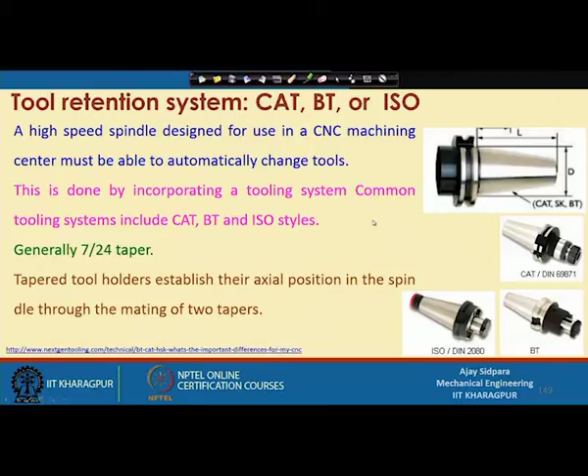So, this is the slide which we have seen, that there are three standards: CAT, BT and ISO standard, and these standards were developed before micro machining came into existence, when there was not much discussion about it. So let us see what are the problems associated with these standards, so that we cannot use them for micro machining applications.

These are the disadvantages. Now we know this is our spindle part and this is our tool holder. When the spindle speed increases, the spindle shaft tends to expand due to centrifugal force and thermal effect, and that is called bell mouthing.

Let us discuss this thing first. Initially our system was completely fine. This was the spindle part and this is the tool holder. So this is the initial condition, but what happens when you start rotating at extremely high RPM beyond the allowable limit?

Then the shaft, the spindle, will try to expand. Because of that, you are getting an opening here. So this is called bell mouthing, that is the problem.

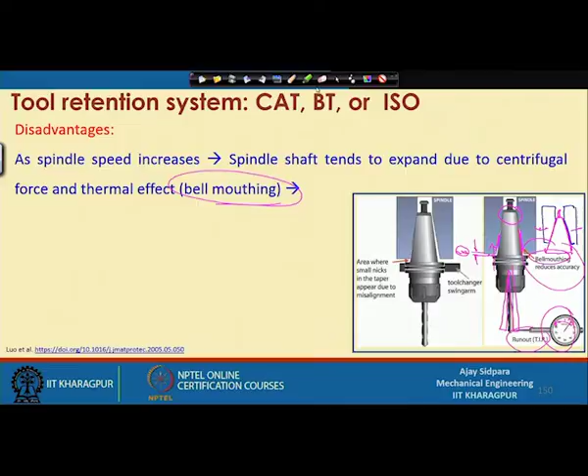Now, the taper of the tool holder is drawn further into the spindle, because the drawbar is continuously holding this thing, pulling in this direction. So if you are getting this part, because of this pull, your whole tool will go further inside. So this is the actual position.

After that, it will shift a little bit inside. Now this is your position — it is touching and clearing this gap, so this face is touching now. Whatever this gap is, that much amount in Z is going inside, and you are not accounting for this in the machining.

Suppose this is your workpiece and this is the feature you want to cut, and consider this dimension is 500 micron depth, and you are cutting a slot out of it. When this happens, what you actually want is for the cutting tool to reach this location, but because your holder is going further into the spindle, your tool is actually reaching at a different location.

So this is your tool z axis, correct. So whatever is this phi here, whatever this going inside, that means how much is the inaccuracy in the z motion. So that much actually inaccuracy you will get in the machining feature, whatever feature you want to create.

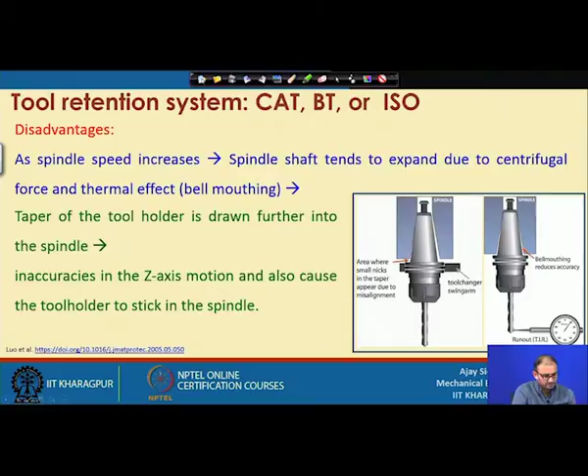Here in this particular case, mostly you will get an oval shape hole. So that is creating more problem in this case. So both ways, ultimately, you are not getting the part as per your dimension. So this is the problem with the CAT BT or ISO type of standard.

So now there is a system called HSK. It is comparatively new compared to the ISO standard we discussed just before. A new DIN or ISO tooling standard has been developed with a particular application for high speed, known as HSK.

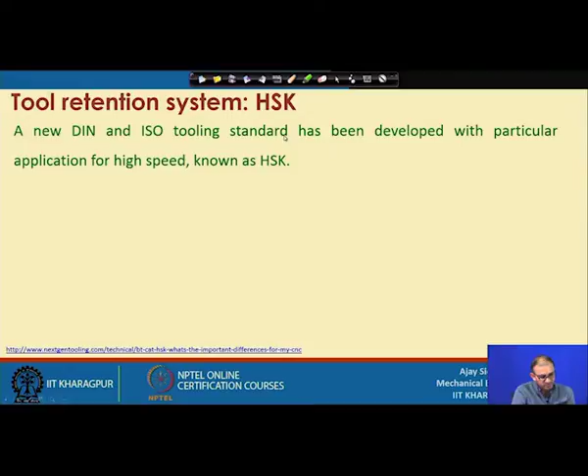It is called hollow shaft, hollow shank shaft, something like that. It's a German name, but it's considered that the shaft is hollow, a hollow shank shaft. So this is the system, and now you can compare both things, how they differ from the earlier case.

Differences are many. First, this much dimension is not present, so it is almost half the length of the conventional CAT, BT or SK standard. Also, the taper is much less. And there is something very important or different compared to the earlier part: it has different types of contact surfaces, not only one contact surface. Let us see what things are there.

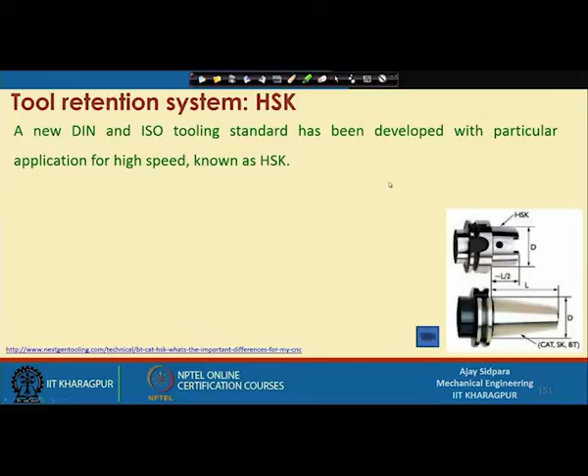It is particularly used for high speed spindles in high precision machining centers, and HSK tool holders are retained in the spindle by a set of internal grippers located inside the spindle. So what is this thing? Let me show you that video.

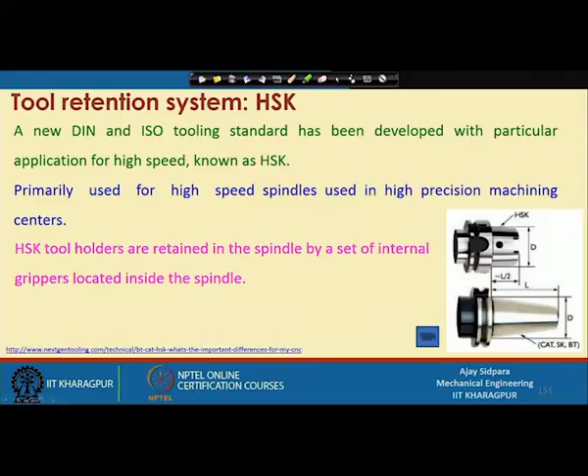So this is an HSK type of spindle. You can see here, this yellow color is the HSK tool holder. Now this is the set of internal gripper. Let me show you that.

Let me finish this part. Now this is the removing of this part. This is the internal gripper. If you see this particular part, when it is going inside, this drawbar component will actually expand and try to push this thing at this location.

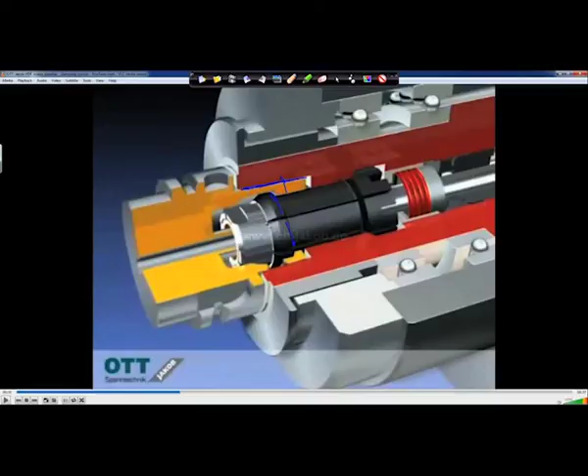So it has a contact here, this is one contact, and not only pushing, after pushing it is actually drawing inside. So you get another contact here. It has a dual contact.

This particular HSK has dual contact, and that is the advantage: even if there is some type of misalignment, your tool holder will not penetrate inside, because it has contact with the face also. So this face contact will not allow it to go inside.

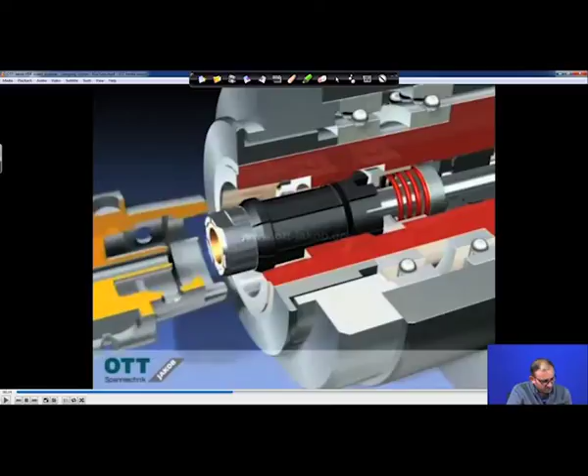So it is going down. When it is moving, it is compressing, and at that time you can remove this particular part away from the system, and then again it first goes inside and then expands. So you get a perfect connection between the two parts.

So this is the mechanism by which you are putting it in, either pneumatically operated or hydraulically operated, so that you can easily get the displacement required without any problem.

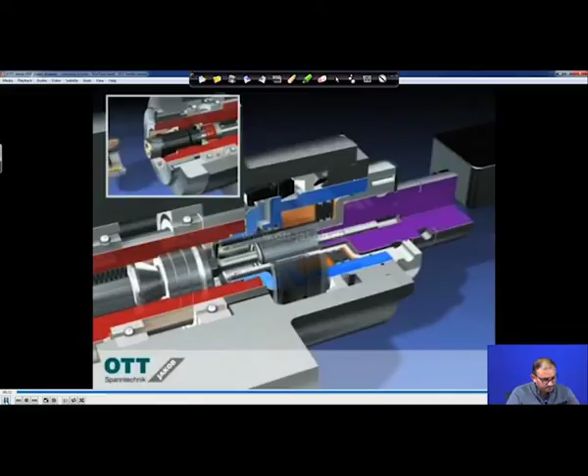Now this is what it is doing. When it is pushing down, this particular thing is getting compressed. So when it is compressed, you can remove this thing away from the system, and then it is pulling back again, pulling this tool holder also, and after pulling it will expand and touch the surface of the spindle system. This way you can get this thing done.

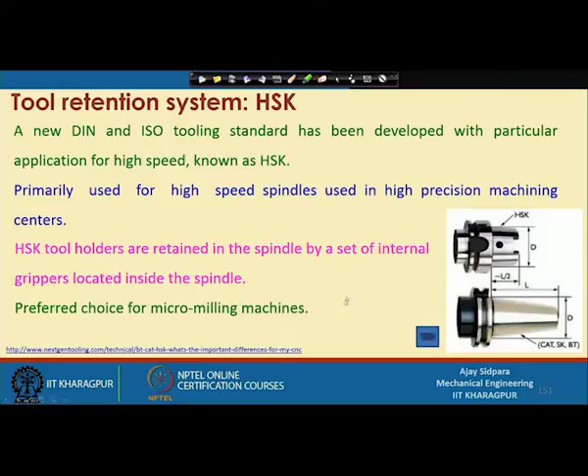Let us see how this is important, how it will create a good joint. Because of this internal gripper, you are getting good acceptance in the micro milling machines. Now compared to contact, let us see how the contact happens, that is what is important.

Now these are the things between the V flange and the HSK spindle. You can see that in the animation it has two contacts, this is one contact and this is the other contact, but in this particular case we know that this stud will be pulled by this drawbar.

When it is pulling back, you have to create a gap here, considered a 3 millimeter gap between the spindle and the V flange. Because if that gap is not there, this pulling has actually no effect. By chance, if this thing is coming into contact first, before it matches this particular taper, then you will get a wobbling motion in this direction and this direction. So this gap will ensure full contact all over the taper direction. That is the advantage of keeping this part.

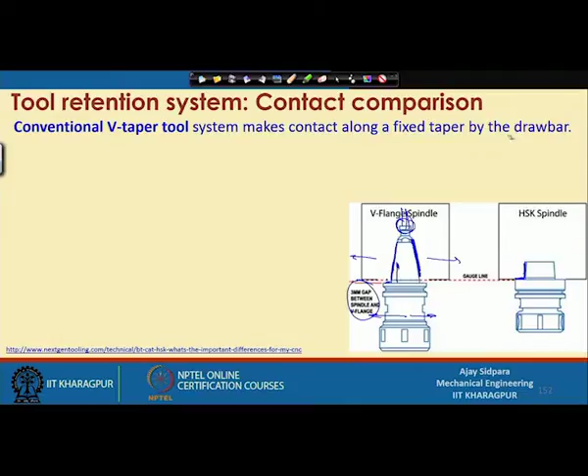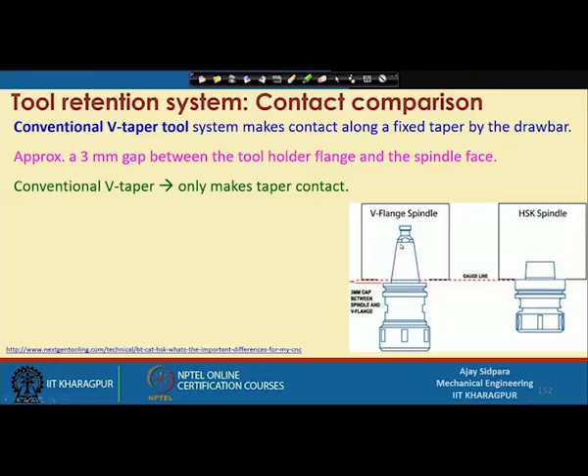But this 3 millimeter gap will create a problem, because when this thing expands, this gap tries to reduce, and then the whole system will go inside of it. So conventional V taper tool system makes contact along the fixed taper by a drawbar. Approximately a 3 millimeter gap between the tool holder flange and the spindle face is given here, so it only makes a taper contact. That is the problem here, it is a contact at the taper only, and that is creating problem.

But HSK is the short taper which fits into the spindle. So this is the only thing which is going inside the spindle, and here you can see it is a very large amount of mass which is going inside the spindle.

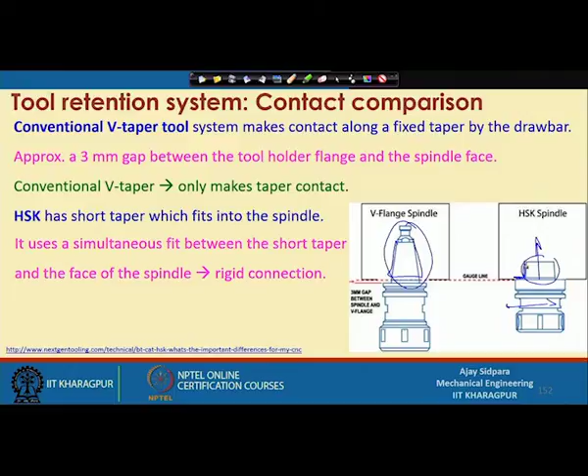It uses a simultaneous fit between the shorter taper and the face of the spindle. Because of that, you get a rigid connection. So now it will not move in any direction, it will not go in this direction also, because this particular face will prevent this motion from happening, and when it will not move in this direction also, because now this is also in perfectly aligned condition.

So in radial direction or axial direction, you will not get any type of movement. It has a dual contact between the spindle face and the taper. So here you get only a taper contact, but here you have a face contact and taper contact, both things.

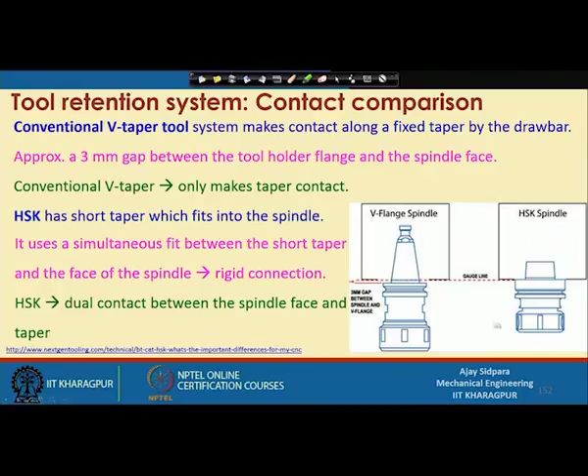Now, how you can compare the drawbar mechanism, the way your drawbar is holding this part. If you see this, our conventional holders are held into the spindle by a drawbar with fingers that wrap around the outside of the retention knob and pull stud. So your drawbar mechanism is located at this location. When your clamping is done, this whole thing is actually moving inside the system, and because of that movement, you get a contact with the spindle face here. So these are the contact surfaces, whatever these two surfaces given, that is the contact surface.

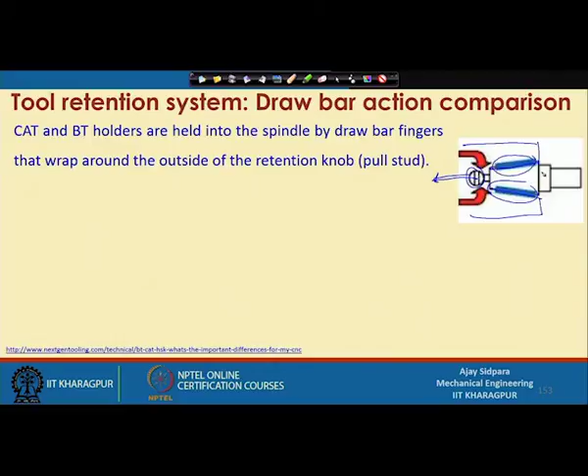And HSK is a different thing. We have seen that it is not like that, it is not pulling any side. First thing, all that gripper is actually going inside it, then it is pulling, and then it is expanding. So it has an internal gripper here. Here it is an external gripper, because whatever it is pulling through the stud, and the stud is located outside of that part. Here what is happening is that it goes inside this part, and then it is expanding, after going inside, then it expands out of it. So it is called the hollow shank, that is because of that name, hollow shank taper. So that is the HSK part.

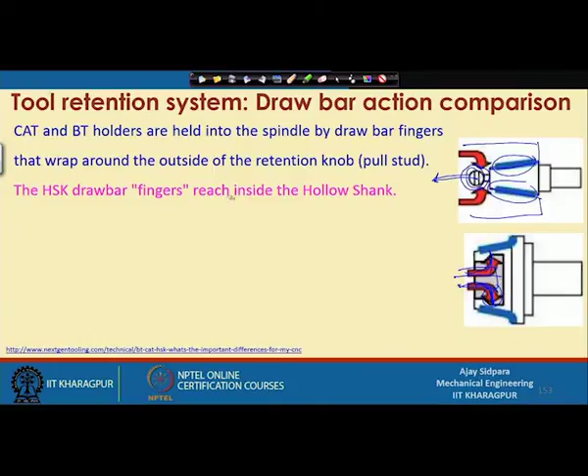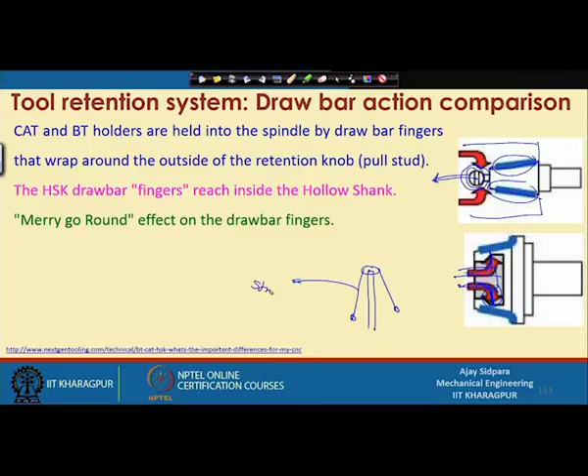So it has a finger which reaches inside the hollow shank, and because of that, you will get a merry-go-round effect in the drawbar. Consider that you have a mass here, and this is the string. So this is the mass, and now you rotate this thing. When you rotate this thing, this whole thing actually goes into the outer dimension, because this thing will go here, depending on the RPM, and then it will go away and away. So that is called the merry-go-round effect.

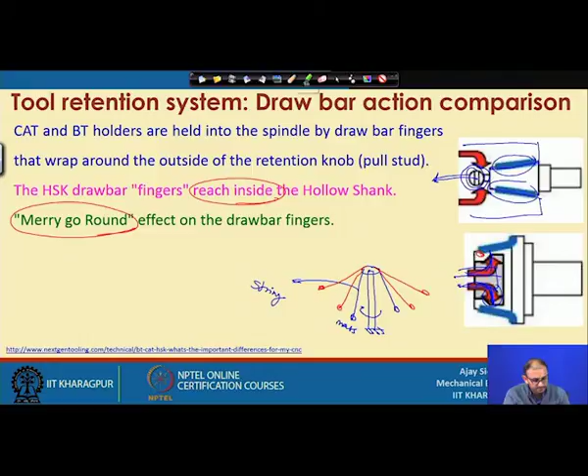But the merry-go-round effect is very good here in this particular case, because it is actually drawing from inside. This word is very important, because if it is going in merry-go-round, then what is happening is that those things whatever are here. Now you can see that your contact is here, correct, so it is an inside contact. So what is the advantage? Whatever the RPM you are rotating, your contact actually further sticks to the surface, it will not expand, but here things are exactly different.

Whatever things are here, this is your spindle part. If this thing is expanding, then what is happening is you will get a loose connection. But here, if it is expanding, you will further get a strong connection. So that is the big advantage of this thing. Even more you go with higher speed, more it will retain, or more it will firmly grip with the surface. That is the advantage, and that thing is called the merry-go-round effect in the drawbar fingers.

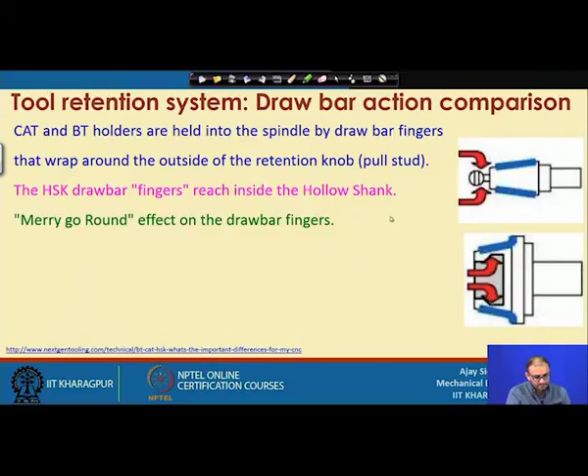So as RPM is increased on the HSK tool holder, the drawbar fingers become a tighter connection on the inside of the flange and increase the pressure onto the spindle connection. So this is the advantage of using this particular part, because whenever you get a higher RPM, your drawbar will push this particular part, and whether it is a centrifugal force action or thermal expansion, everything will make this thing more strong. Here, those types of thermal expansion or centrifugal force will actually adversely affect the conventional tool holder. So that is the difference between these two different systems.

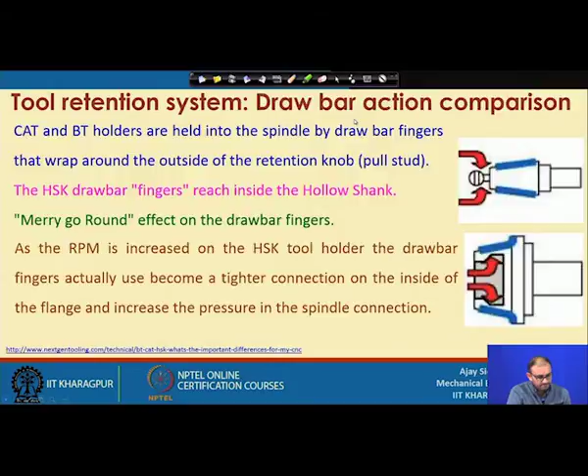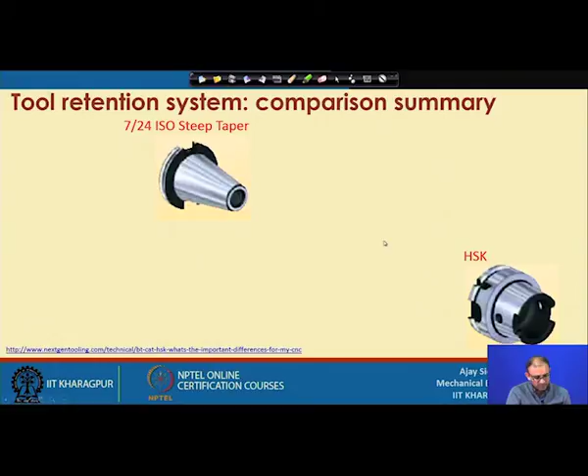So now, what are the comparison summary between these two systems? This is the taper ISO BT standard, whatever we are thinking, and this is the HSK tool holder. So first thing is the one surface contact here, and here you get the dual surface contact. That is the big advantage.

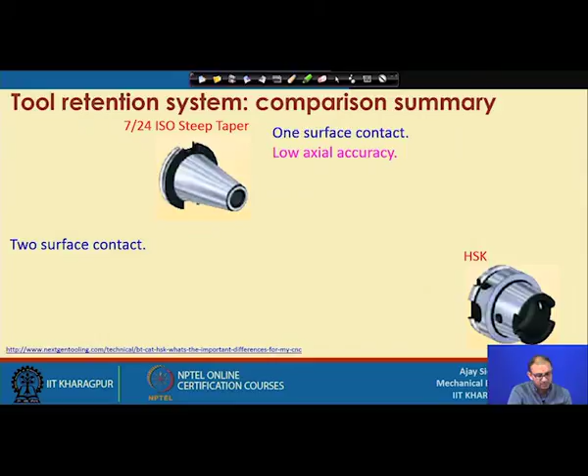Low axial accuracy, because now we know we are getting a shifting in the Z direction. Whatever problem is there because of this misalignment, everything will be reflected mostly onto the Z direction, and if you compensate with the Z direction, then again it will create a problem in both X and Y. But here you get the higher axial and radial accuracy, because you have a dual contact on two surfaces.

Relatively low stiffness here, because whenever you are putting a load in the axial direction or radial direction, the problem is you are getting a deflection, because the contact here is friction contact only, and that is also on one surface. Because of that, you will not get high stiffness on the part. So here you get higher stiffness, because it has both static and dynamic stiffness high compared to this particular system.

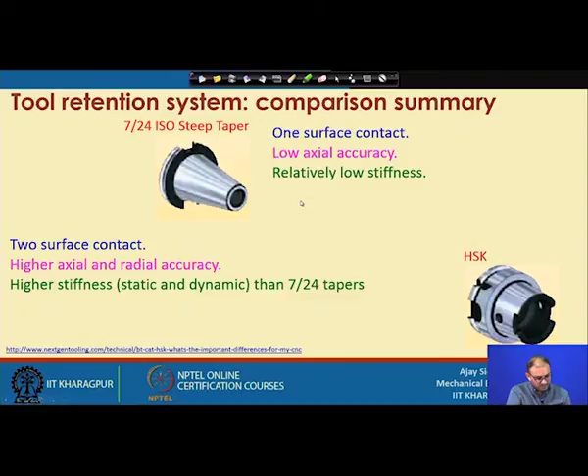Not suitable for high speed, because it has outside clamping, as we just discussed, whenever there is outside clamping, at high speed the centrifugal force and thermal expansion both adversely affect there. But this thing is suitable for high speed because it has inside clamping. This inside clamping will make your system more and more strong when it is rotating at a high RPM.

Another thing is the large mass and the stroke. That is also creating a problem, because you have to remove this particular thing very quickly, and you also need higher speed, because when your mass is high, rotating at high RPM is also creating problems. Every time you have to provide more stroke here, because when your automatic tool changer is removing things from here and putting something different, it has to pass through a very large distance in the Z direction. But that is not the case here, because we have seen in that figure that the length is almost half of the length of the normal conventional part. So you can actually get the faster change as well as the higher speed, both things possible in the HSK tool holder.

And the problem here is the possible run out due to the taper fitment, because when you are making this thing, you have to make sure the machine spindle taper exactly matches the tool holder taper. If those things are not matching, even a fraction of a micron here and there, that will create a run out directly to the tool.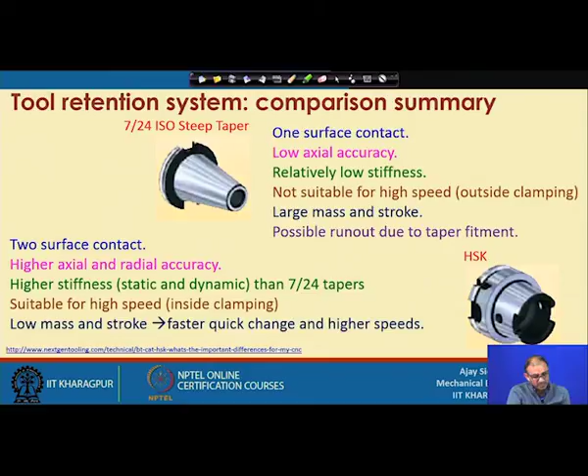Because first thing is we have three connections, as we have seen, from spindle to the tool holder and tool holder to the tool. So if any of these are not making a perfect connection, then everywhere you will get the run out. So these are the differences between the two systems, and mostly because of these particular differences, we can think that only HSK is the best suitable for the particular application in micro machining.

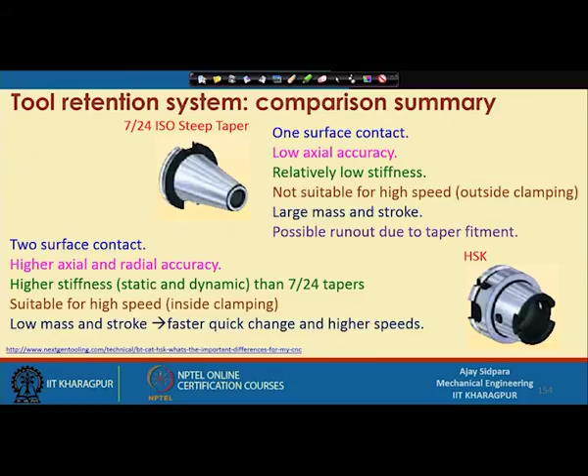So, we have discussed till now that there is the taper contact in the conventional thing, and HSK has two contacts - one is the taper surface and another is the flange surface. But there are some very customized tool holders available where the surface has three contacts.

Now, if you see this particular system, it has three contacts here. One contact is obviously the face part, and there are two contacts at two different locations. So these are the three things. Because of that, you will get three surface contact for improved stability and accuracy, optimizing clamping force distribution and interference fit, and providing higher stiffness.

This is mostly used when you are doing very high speed machining under high load, that means when you are machining hard material with a high depth of cut - an aggressive machining part of thing. So HSK is still useful, still fulfilling all our requirements for micro machining, but this slide is showing that not only two surface, but three surface contact holders are also available, and that is one of that particular part.

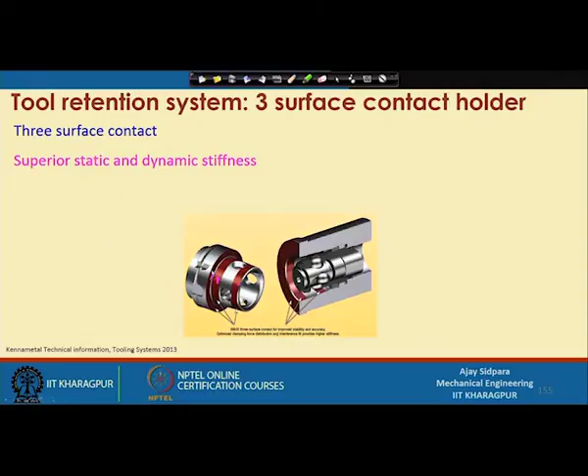Now, what are the advantages here? It has 3 surface contact, and we know that more the surface contact, more stiff it will become. So here it has a very high static and dynamic stiffness, because now you do not have any chance of moving in x, y or any z direction.

And for static and rotating applications, wherever you are using this particular part, it has a very high demand, and it has the highest maximum speed. So whatever RPM you are rotating, it will still fulfill that requirement.

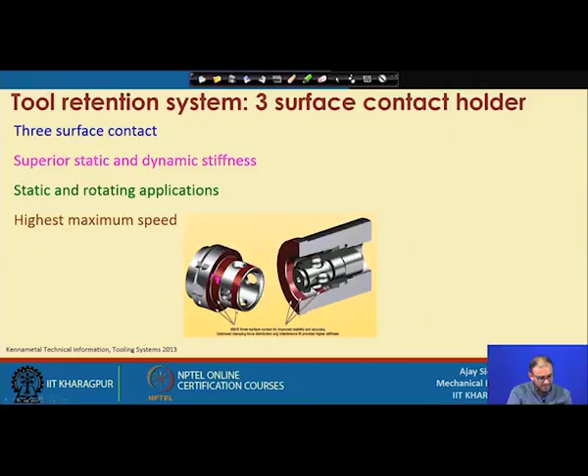So these are the advantages of using 3 surface contact, but this is mostly very useful when you are doing stock machining - that means high speed cutting, or normal machining operations where the material is very hard and you are not able to get those results with CAT, BT, or ISO standard. So that is the advantage here.